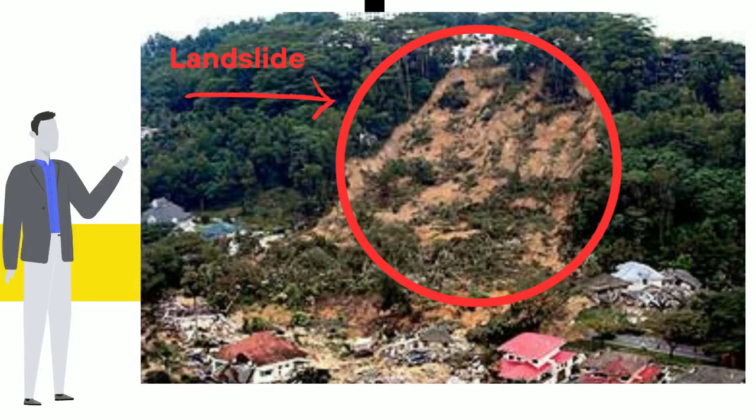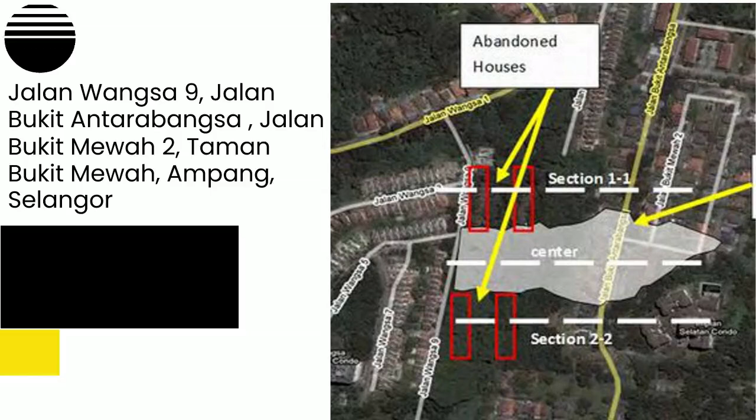In this case study, a landslide event known as the 2008 Bukit Antarabangsa landslide happened on December 6, 2008 in Ulu Klang, Selangor, Malaysia. The landslide tragedy at Taman Bukit Mewah and Taman Bukit Utama occurred at approximately 3:50 a.m., resulting in the collapse of 14 bungalow houses, 15 injuries, and 4 fatalities. Our site location is at Jalan Wangsa 9, Jalan Bukit Antarabangsa, Jalan Bukit Mewah 2, Taman Bukit Mewah, Ampang, Selangor.

The objectives of this study are to analyze the geotechnical factors contributing to the soil failure, to propose suitable site investigation (SI) methods for the landslide area, and to implement advanced, integrated site investigation technologies that enhance the accuracy and comprehensiveness of data collection. The main causes of this landslide are soil creep, damaged active water pipes, and prolonged rainfall.

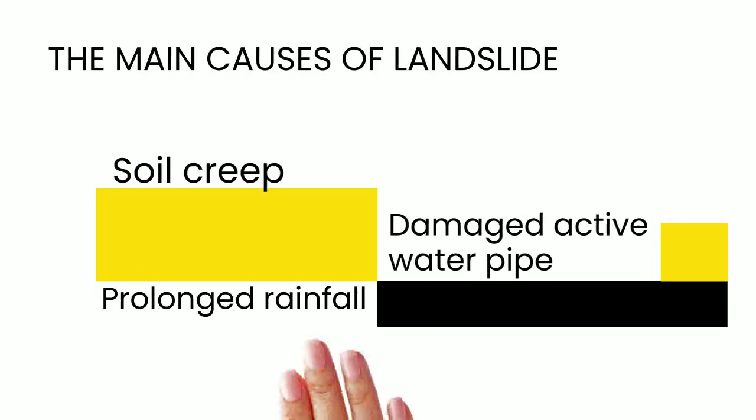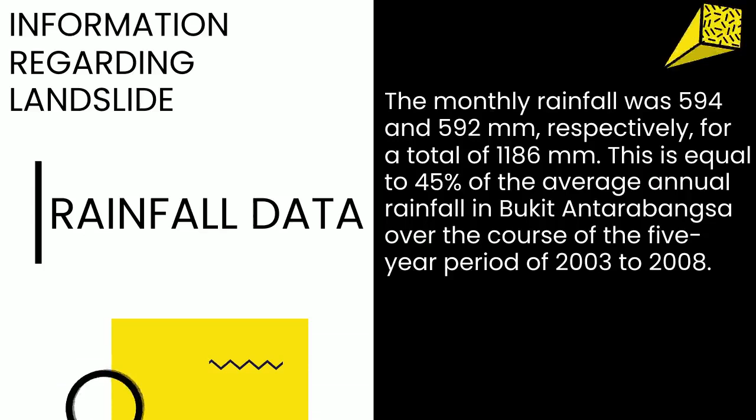The information regarding the landslide: rainfall data. The monthly rainfall was 594 and 592 mm, respectively, for a total of 1,186 mm. This is equal to 45% of the average annual rainfall in Bukit Antarabangsa over the 5-year period of 2003 to 2008. Geology of the landslide area. The residual soils in this region consist of granite that has been left behind from the parent rock mass at different stages of disintegration.

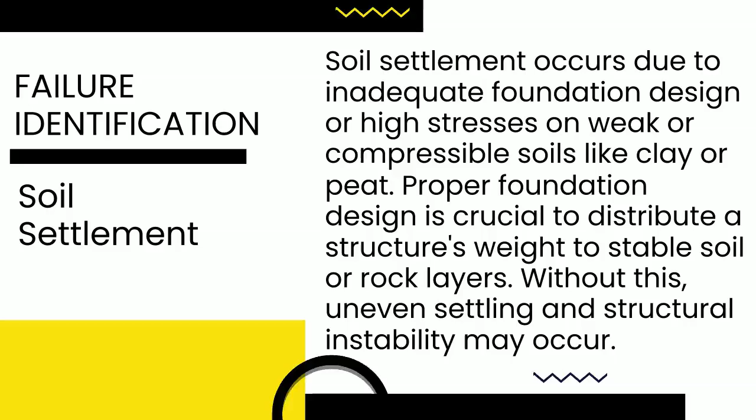Failure identification. Soil settlement occurs due to inadequate foundation design or high stresses on weak or compressible soils like clay or peat. Proper foundation design is crucial to distribute a structure's weight to stable soil or rock layers. Without this, uneven settling and structural instability may occur.

Heavy rain poses risks such as floods, landslides, and infrastructure damage due to poor drainage systems. Excessive precipitation can overwhelm drainage infrastructure, causing floods in both urban and rural areas. Interrelationship for all stakeholders involved: government agencies and authorities, engineers and geologists, contractors and construction companies, local communities and residents.

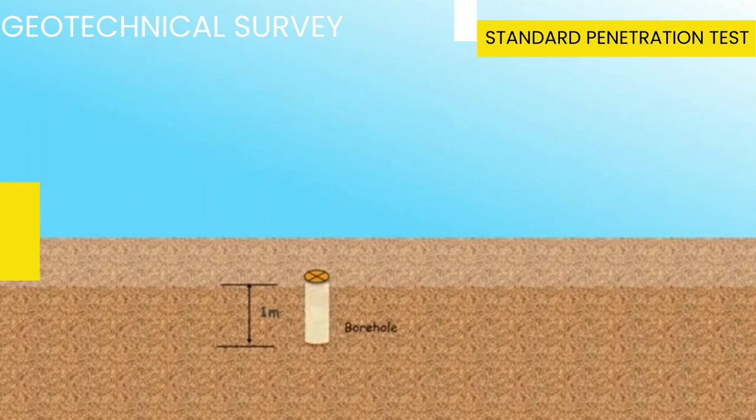Standard penetration test. Consider this as the site, and here is the point where we wish to explore the soil properties at a depth of 1 meter. Now make a borehole up to the desired depth. Place the tripod concentrically above the borehole. Take the guide rod and fix the sampler at the bottom. Attach the hammer of 63.5 kg and anvil to the guide rod. Make a marking of 75 cm above the anvil to have a uniform height of fall.

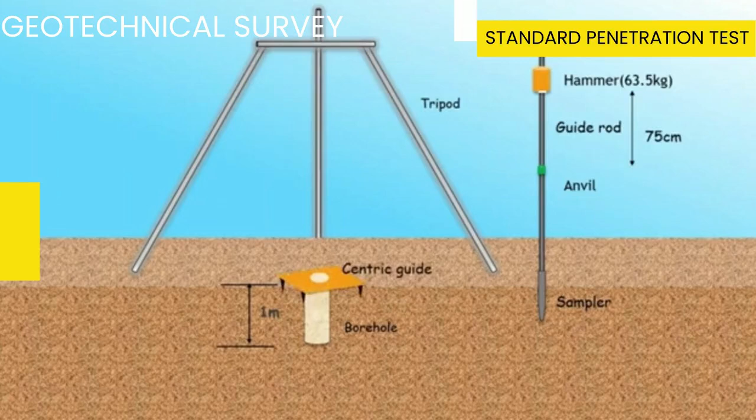Keep a pulley at the top of the tripod and suspend the rope over it. Attach the hammer to one end of the rope using a hook. Make 4 markings along the guide rod starting from the ground surface at an interval of 15 cm each. Now drop the hammer through 75 cm height and start penetrating the soil. Did you start counting the blows? The blows required for the first 15 cm penetration are not considered, as it is a seating drive. Blows required for the second and third 15 cm, that is from 15 to 30 cm and from 30 to 45 cm, are recorded. And the N value is recorded.

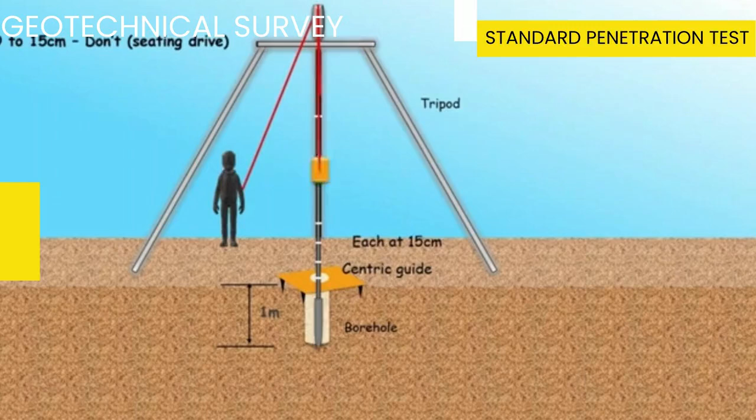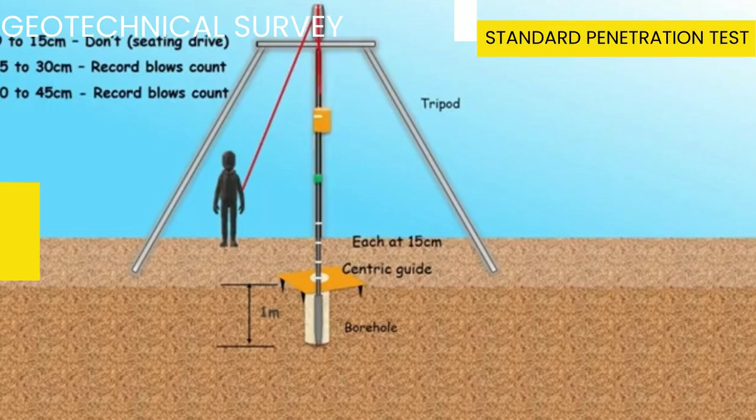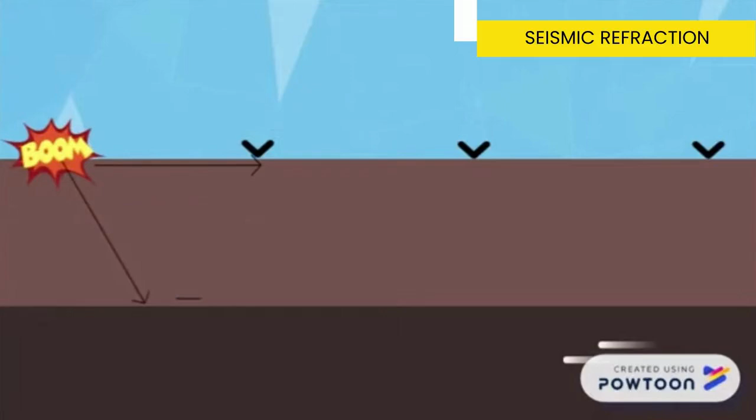Seismic refraction. Refraction starts very similarly to seismic reflection, but with some major differences. For example, these direct waves matter now, and so does this wave at the critical angle. The waves arrive simultaneously, but here the refracted wave is faster. The top layer is normally slower than the one under it. Therefore, eventually the shortest route is no longer the fastest, because the refracted wave can go at a higher speed.

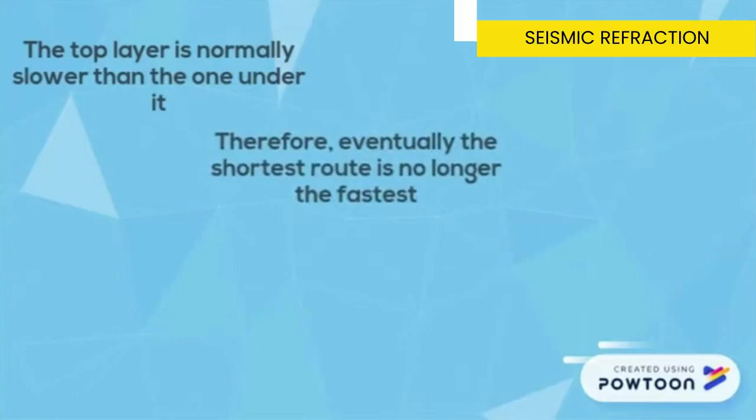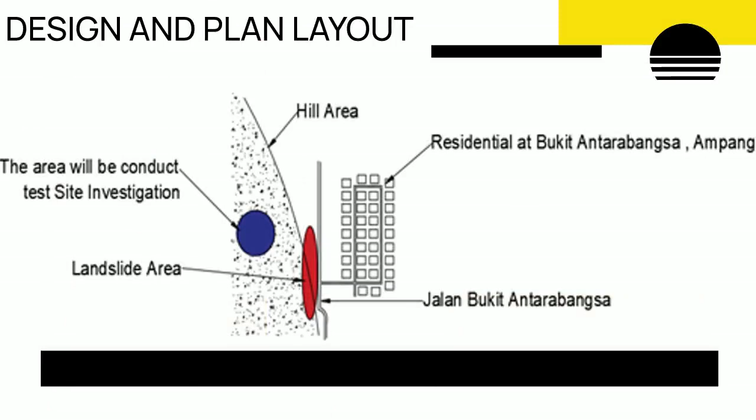The innovation that we do is user-friendly interfaces and mobile apps. Developers have created user-friendly mobile apps for SPT testing and seismic refraction surveys. These apps guide users step by step through the testing process, providing clear instructions and prompts for accurate data collection.

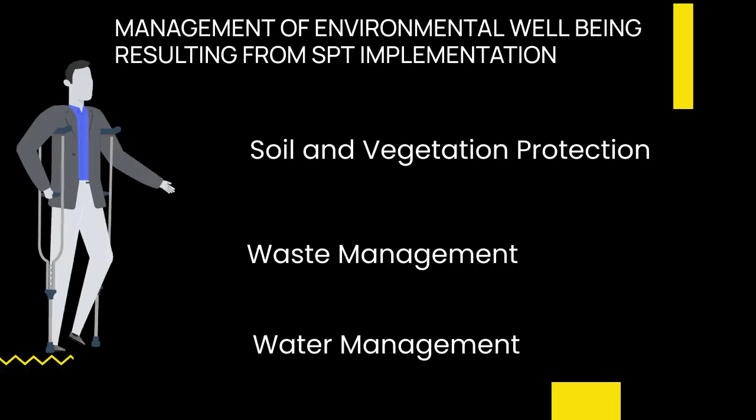Next is voice command integration. Incorporate voice command technology into testing equipment and software interfaces to allow users to control the testing process hands-free. Users can verbally initiate tests, input data, and receive test results, reducing the need for manual interaction with equipment and improving efficiency, especially in challenging field conditions. Management of environmental well-being resulting from SPT implementation: soil and vegetation protection, waste management, and water management.

Conclusion. The December 6, 2008 landslip at Taman Bukit Mewah, Bukit Antarabangsa, was caused by high pore water pressure. A detailed examination of geological data, rainfall records, and site conditions revealed key insights into the event's causes and effects. The standard penetration test (SPT) proved invaluable for assessing soil stability and suitability for stabilization, offering advantages in efficiency, speed, and cost-effectiveness. The report underscores the importance of proactive risk assessment, effective mitigation strategies, and ongoing monitoring to safeguard people, property, and the environment from landslip threats.